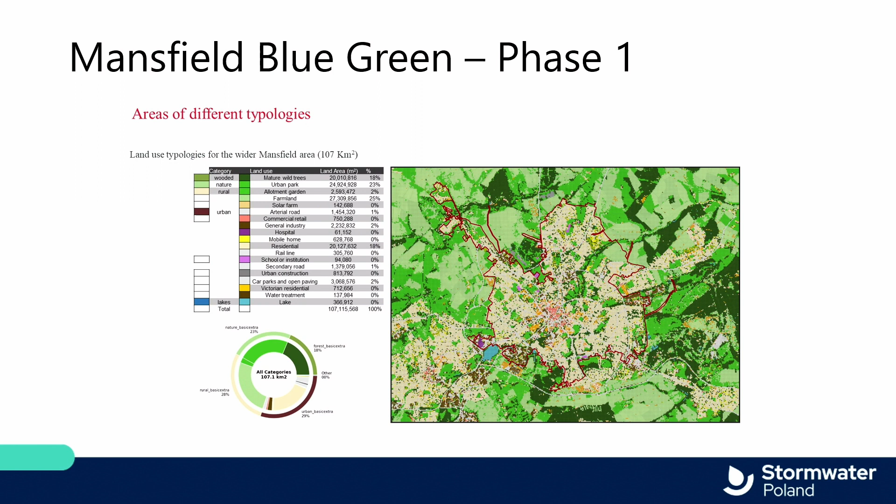The next step was then to map the relevant blue-green measures to specific Mansfield land uses. This gave us an understanding of the measures that are easily deployable in each typology. For example, in this case, permeable paving is deployable in residential areas, car parks, or commercial areas, but not appropriate for other land uses. This matrix was co-developed by the water utility client to match their appetite and level of ambition for green interventions.

We then selected typical sample locations for each typology. And for each sample location, we designed solutions for each area using the matrix, taking into account local conditions such as road arrangements, ground slope, traffic, existing infrastructure. The aim of that process was to ensure that there was a robust engineering evidence base behind our proposals to allow us to strongly ground truth the outputs from the digital analysis.

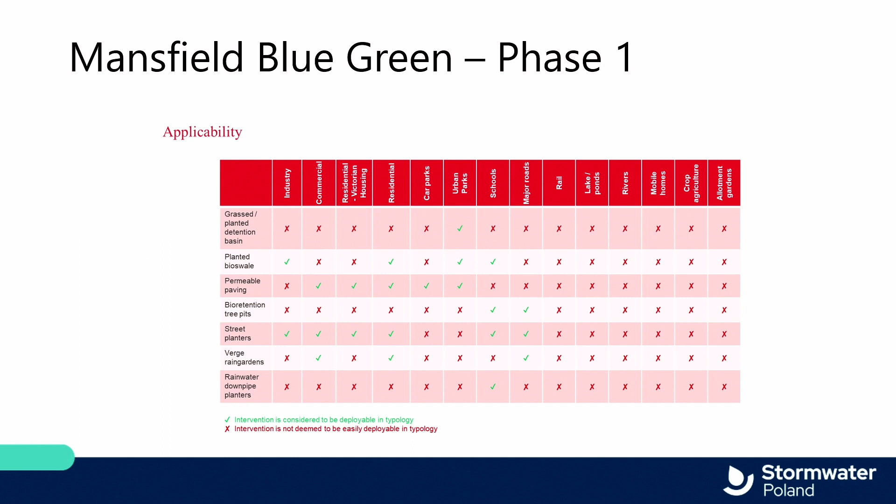So using our digital tools, we were able to establish the potential for each typology to provide blue and green infrastructure and storage. And by combining this data with the land use areas derived by terrain, we were able to quickly assess the potential of the whole town to accommodate blue and green measures and also quantify the number of each intervention.

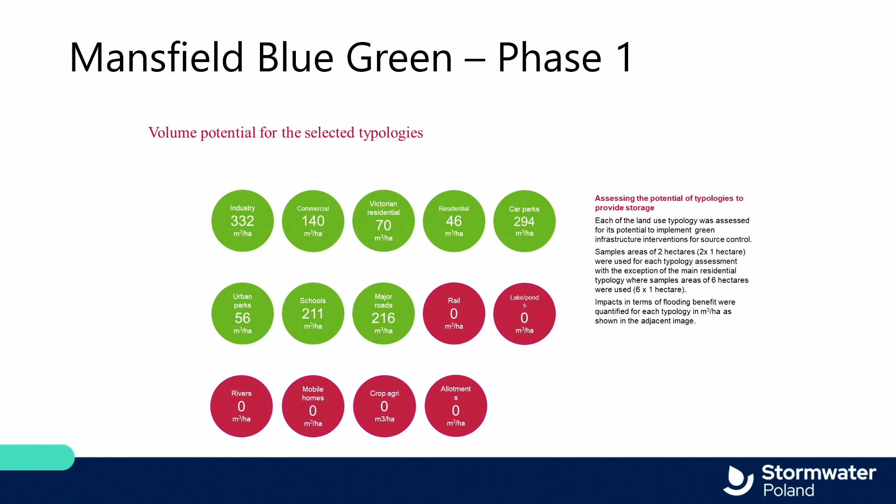And as part of this study, we used the wider benefits associated with blue and green assets. The benefit mapping exercise uses an input-output outcomes model that displays connections between resources, activities, and outcomes of a project. And for the purpose of this exercise, we also mapped the benefits to a six capitals framework, which is the framework the utilities in the UK generally use for looking at benefits, including natural capital, social capital, financial capital, manufactured capital, and intellectual capital.

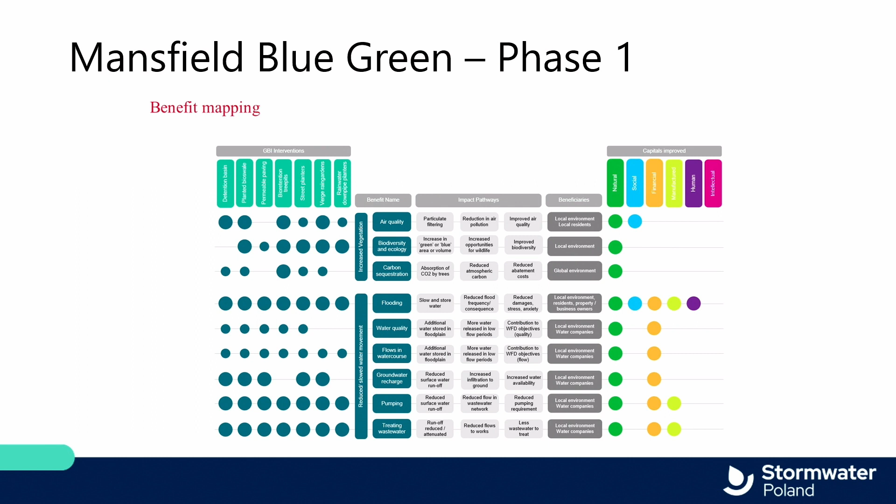We were then able to assess and monetize some of the benefits. Benefits were excluded from valuation if information available was not sufficient for a quantitative assessment. Benefit transfer was the main method of monetization used in this study. And the table outlines the value selected for the monetization of each benefit and the formula used for the calculation. And the graph on the right presents the cumulative benefits over 25 years.

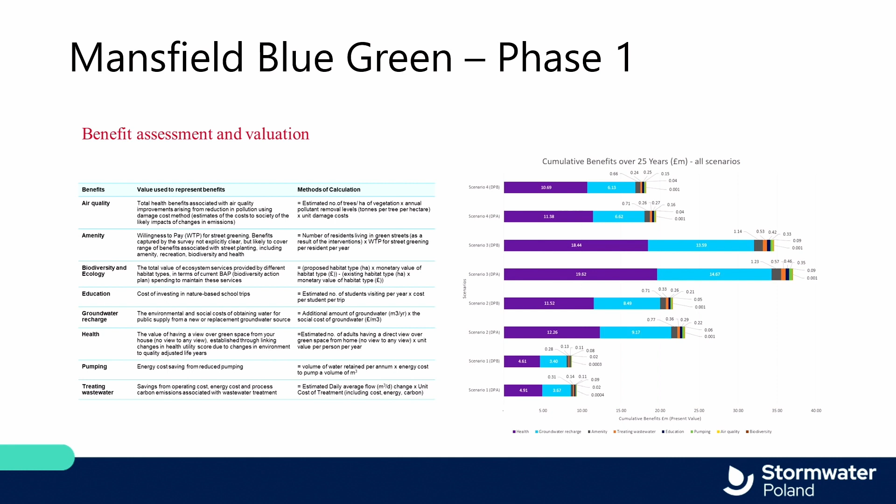So after securing funding, the next challenge was then to support our client in delivering a rapid rollout program. We recognised that a similar innovative strategy was needed to enable the client to plan the delivery of the project and saw an opportunity for digital methods to be able to help. Whilst the client had a town-wide storage target and a budget and some basic intervention requirements, this was based on a master plan study, aggregated across the town. It did not give sufficient detail to base more detailed strategic decisions upon.

We therefore worked with the client to develop a town-wide design tool to assess and locate blue-green infrastructure rapidly on a street-by-street basis, enabling Severn Trent, our client, to rapidly trial different strategies before finalising the overall strategy for the project.

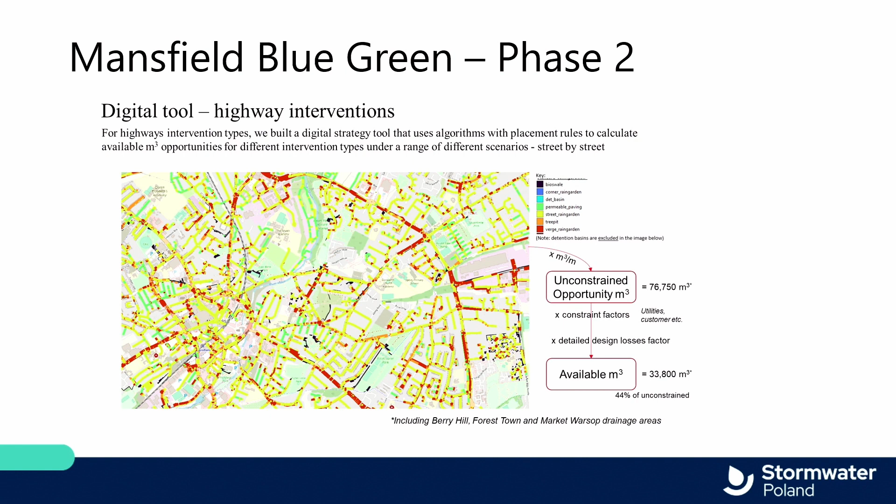And to further support the client in delivery, we also developed a town-wide dashboard that the client is actively using both to test strategies and to monitor delivery. The dashboard has supported them in their decision-making, allowing them to reach a balance of interventions at a cost that they can afford, optimising the process. What they have now is a process that any town or city could replicate that can enable rapid identification of blue-green potential to support both business cases and implementation.

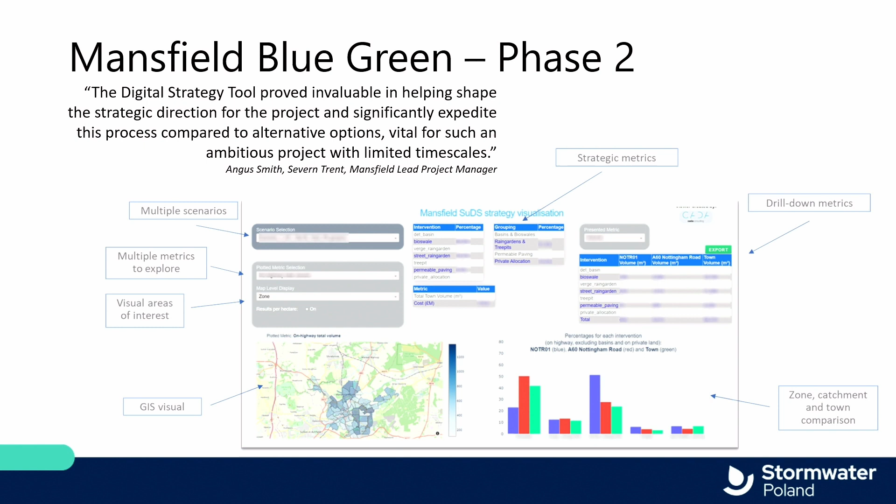The third example: if we are to deliver next generation blue-green infrastructure at scale, we need better tools to understand and identify the potential for their early use in the project assessment process. Too often, nature-based solutions are seen as an add-on or an afterthought.

We've been working with Scalgo in the UK to develop a proportionate and accessible tool to enable early exploration of nature-based solutions within catchments. It is not a detailed design tool, but a process that allows impact and benefit to be rapidly considered at an early stage. This then allows potential costs and benefits to be understood and supports early collaboration with stakeholders and landowners to deliver nature-based solutions.

The tool is a web-based mapping tool for the initial assessment of the potential of nature-based solutions, initially on flood schemes, focusing on natural flood management. The aim is to mainstream these assessments within scheme design, with the hope that it will lead to greater uptake of these solutions in projects. At the moment, the scope of the tool is limited to the UK.

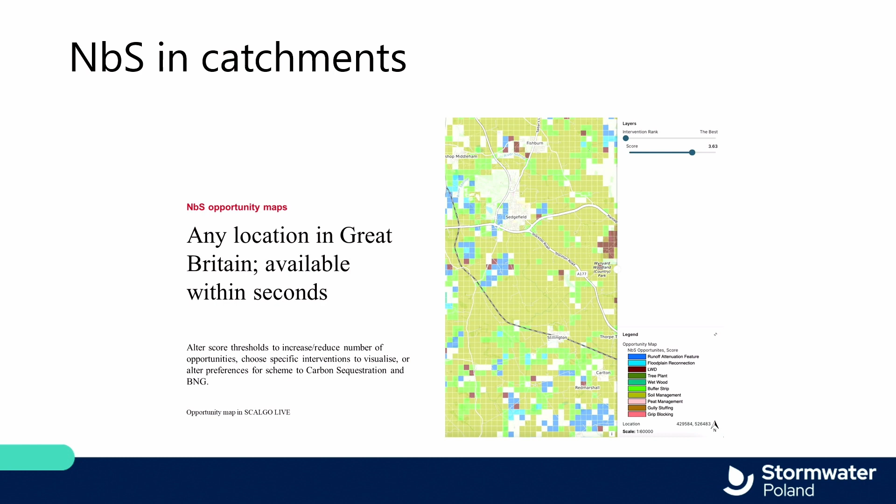Within the tool, there's a multi-criteria analysis using a range of online data sets that determine suitability scores for 10 types of nature-based solutions on a 150-metre grid. Nature-based solution types include attenuation, wetlands, and tree planting, for example. The tool is a dynamic interactive tool. Threshold and suitability scores can be set to increase or reduce the amount of opportunities being displayed, and alternative options for nature-based solutions can be sought by changing the suitability ranking.

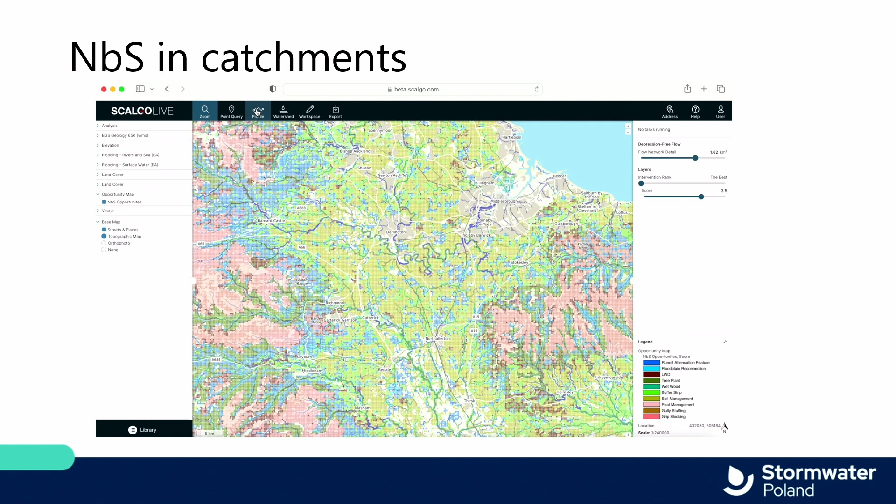In addition to considering flooding, the map display can be altered to show the relative suitability for carbon sequestration, for example, or habitat creation. If you select a watershed, you can explore some baseline data, such as baseline carbon sequestration values. You can then look at the potential impacts once nature-based solutions are applied. It is then possible to look at specific interventions. How much are they likely to cost to implement? What benefits could they bring to either carbon or ecosystem function or water storage?

The aggregate tools are dynamically linked, so when you change one criterion, all the outputs, such as cost and carbon sequestration values, change immediately. And you can generate a cost-benefit graph to explore available budget compared with benefits across the scheme, making sure we can look at good value for money.

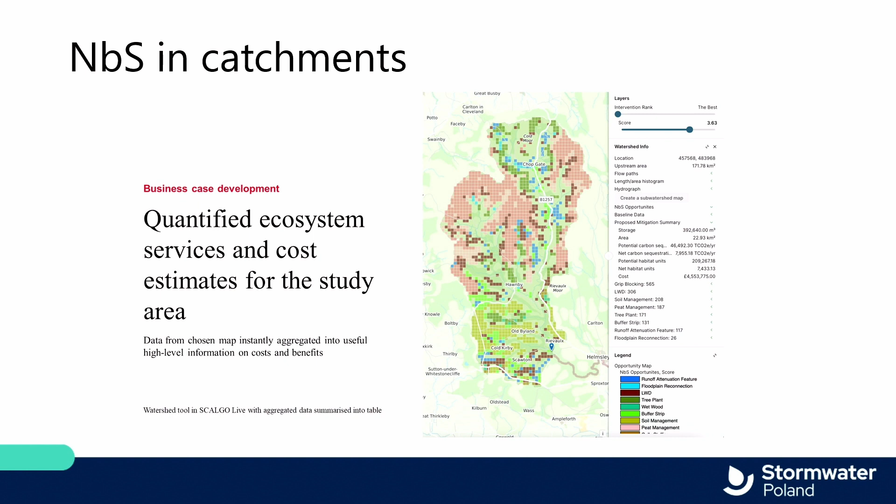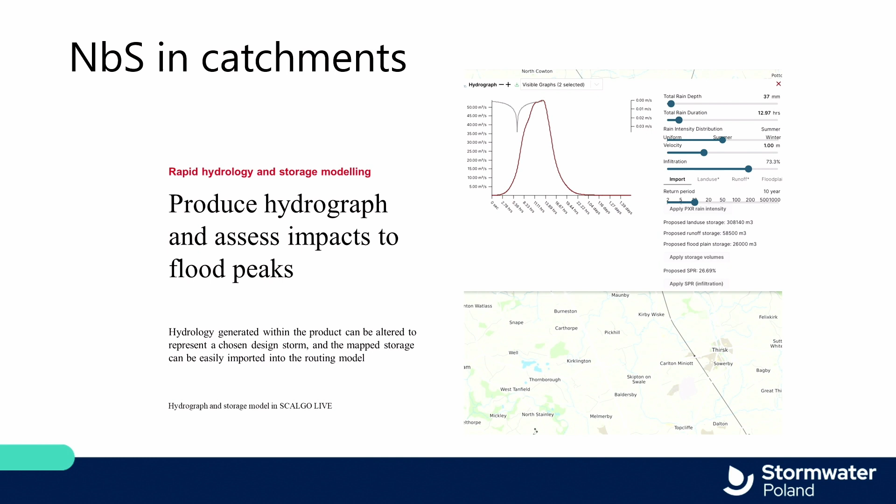Whilst remaining in the web-based software, the hydrology of the catchment and watershed can also be explored. This then allows an initial assessment of the potential impacts to downstream peak flows resulting from the mapped nature-based solutions, which can then inform scheme design approaches in terms of the potential for nature-based solutions or natural flood management to support flood risk. We're now actually using this approach across the UK in our flood risk management projects, allowing early identification of interventions to support detailed design and landowner consultation activities.

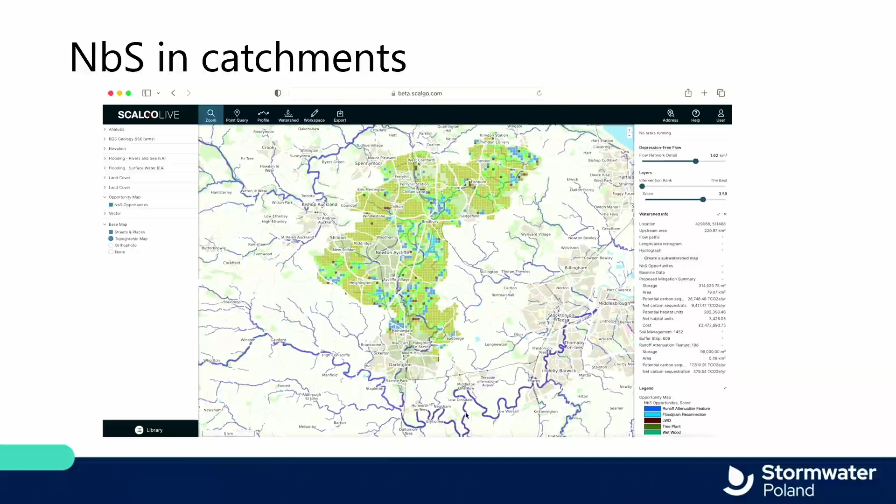The fourth example is New York, and I love New York as a blue-green infrastructure example. I think it's a visionary program they've operated out there. I wanted to briefly reflect on our experience in New York, which I see as one of the beacon cities for a blue-green approach, where there is now over 10 years of experience in retrofitting blue-green infrastructure into complex and cluttered urban environments. When we talk to cities and they say it's too difficult, I always point them towards New York.

The New York approach was driven not really by flooding, but by a need to improve water quality in the Hudson, and hence a need to better control CSO spills. A detailed study, as presented in the New York Green Infrastructure Plan in 2010, identified the opportunity for a blue, green, grey solution to manage stormwater, whilst also delivering a cost-effective solution with wider benefits to the city. It was a visionary approach at the time. Arup has been involved with the project from the early stages of delivery and has delivered almost 1,000 interventions across the city.

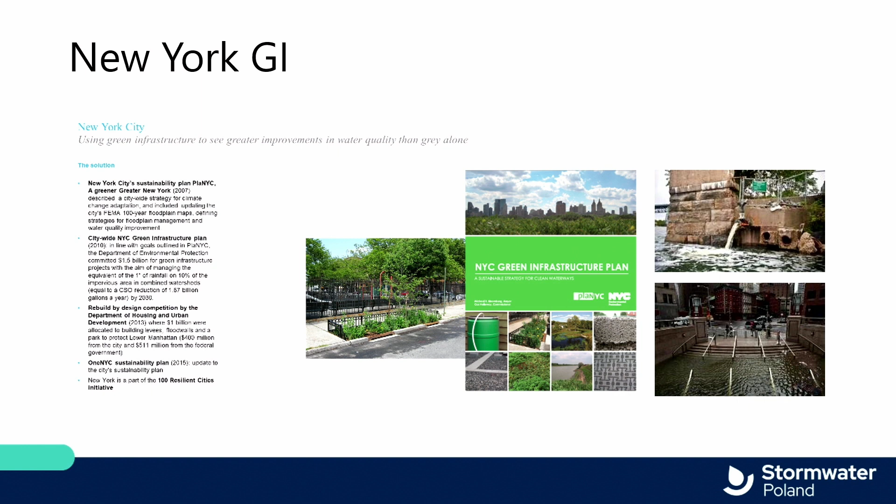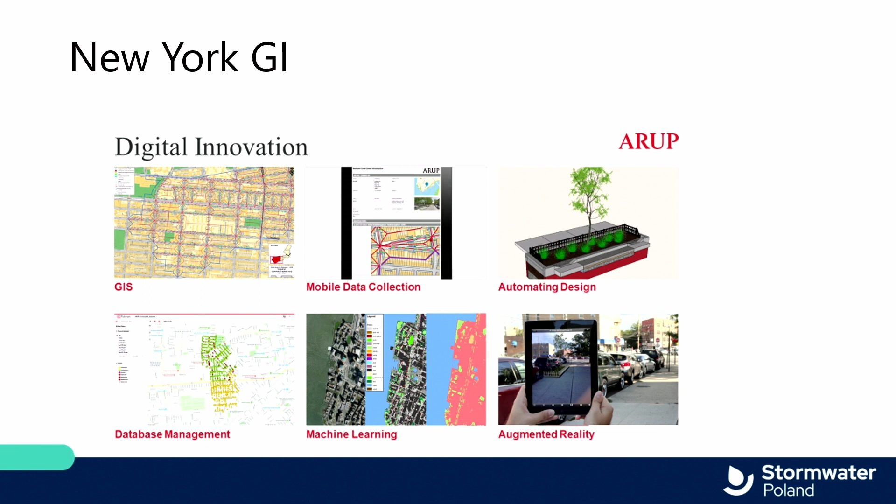Over those 10 years, our experience has shown that digital solutions have a key role to play in a large city, whether that's GIS mapping, mobile data collection, or automated design. If we are to deliver blue-green infrastructure at scale, we need digital solutions to support us. So the output is a network of interventions across the city, which Arup and others have supported in delivering.

The outcome is a more resilient city and a far more attractive and healthier city with the potential for wider benefits. And the city is now very experienced in the delivery and management of these systems. In particular, they have developed processes for the operation and maintenance of these features, which are now an integral part of the city's infrastructure and asset base.

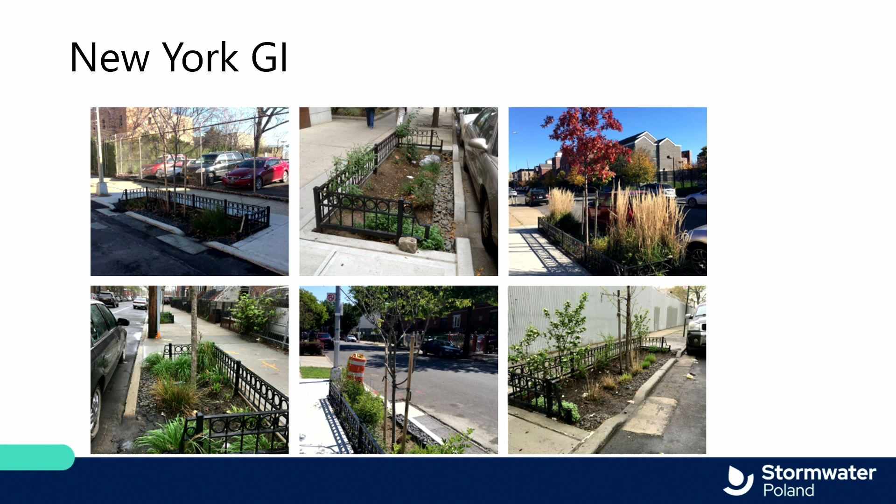And I love this photo. They are now just a key feature of New York's landscape, bringing value to the city beyond their core function.

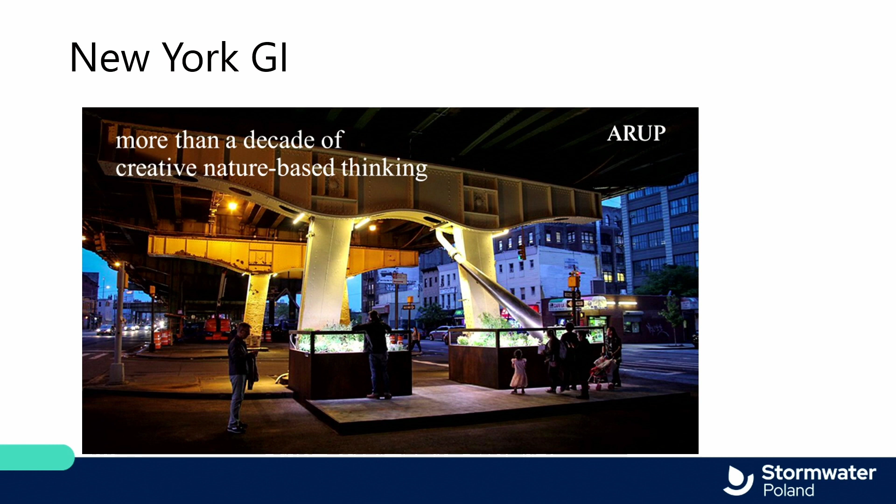Fifth example is stormwater in London. The argument for blue-green infrastructure has, I think, largely been made. I think we all in this room would support that. And there is agreement in the value that nature-based solutions can bring to urban water management. Often the key challenges are not technical, but financial. We often see challenges around who benefits and who pays. Different collaborative arrangements and market mechanisms are developing to overcome these barriers.

The concept of stormwater markets is not new. They have been in place in the US for a while. But in London, we're currently supporting the city in the scoping of a potential market approach there. Like most cities, London has experienced being badly impacted by extreme weather events, with a big event in 2021 that disrupted a number of properties.

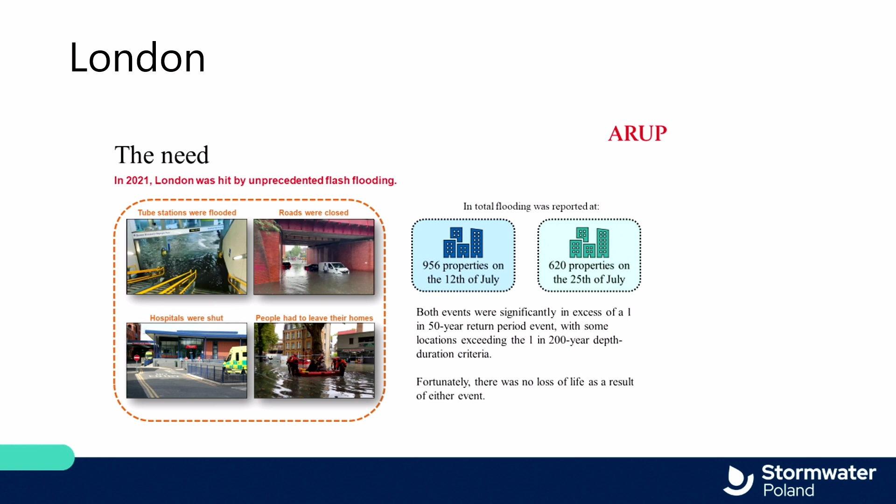The events of July 2021 were a catalyst for change and brought together various parties across the city to explore a new approach to managing stormwater, aligning priorities, working together, sharing knowledge, and looking at co-funding opportunities. And the city is working to strengthen the mechanisms for reducing flood risk across three streams: spatial planning, implementation of SUDs on new assets, and making better use of the public realm. And the aspiration for the city is high through to 2050.

But if this ambitious target is to be delivered, the city will need to optimise the opportunities to deliver SUDs across all aspects of the management of the city. One area of particular focus is street works. There are over 20,000 major street works and 140,000 standard street works in London each year, where the city is dug up for maintenance activity, whether that's ICT or electricity. And to date, very few of those works have resulted in SUD schemes.

Street works offer huge potential for one strand of activity to retrofit SUDs across the city. This potential is further enhanced by digital technology, where we can get insight on where areas with an opportunity need for SUDs overlap with potential future street works.

So effectively, the model we're exploring is this. The water utility or the city identifies priority areas for SUDs interventions based on their modelling and regulatory targets. When street works are undertaken, the proposed working area is mapped against these priority areas. Where there is alignment, then a market mechanism occurs, with payment to the contractor to also deliver SUDs. Lots still to be worked through in terms of how it will work, calculations of market value, but a huge opportunity to deliver SUDs efficiently at scale and optimise processes.

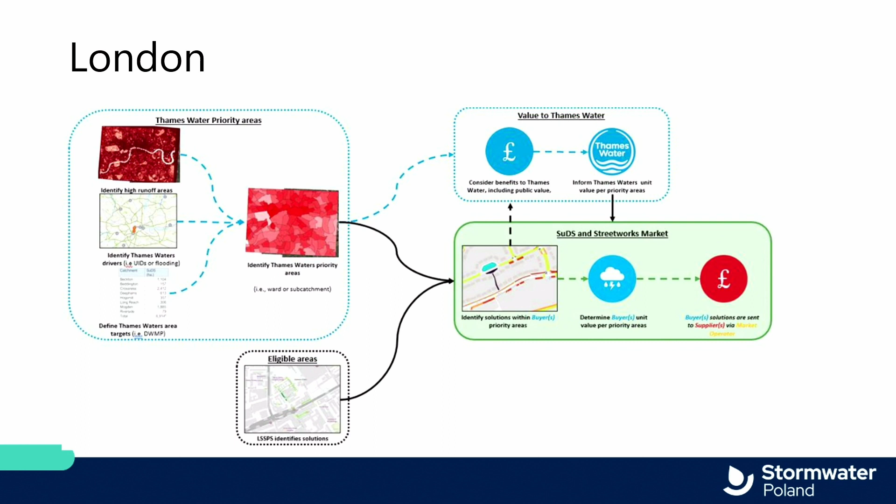...been around technical and financial issues, which is all very important. But I also think it's important that we remember that blue-green schemes all sit within communities. And we are continually exploring tools and processes to best engage local communities in solving wider flooding issues. And we currently have one live research project in the UK working with a number of water utilities there.

SUDS Plus is an innovative government-funded project. It is aiming to establish a community-based approach for designing, delivering and monitoring SUDs that provide multiple benefits to the community and the environment. The project is aiming to focus on how water can be shifted from a problem to an asset. And it is aiming to redress the traditional approaches where residents are consulted very late, and to work with them from the start to co-create interventions.

One of the key challenges we need to address is language and communication, ensuring that complex principles are presented simply and are understood. As research develops, we are developing a number of outputs that may be of interest, including engagement and workshop tools, survey proformas, and reports and visuals. Please feel free to explore them. But I do think it's important that in amongst all the clever technical innovations that you may be exploring over the next few days, we continue to also innovate in how we engage and work with local communities too.

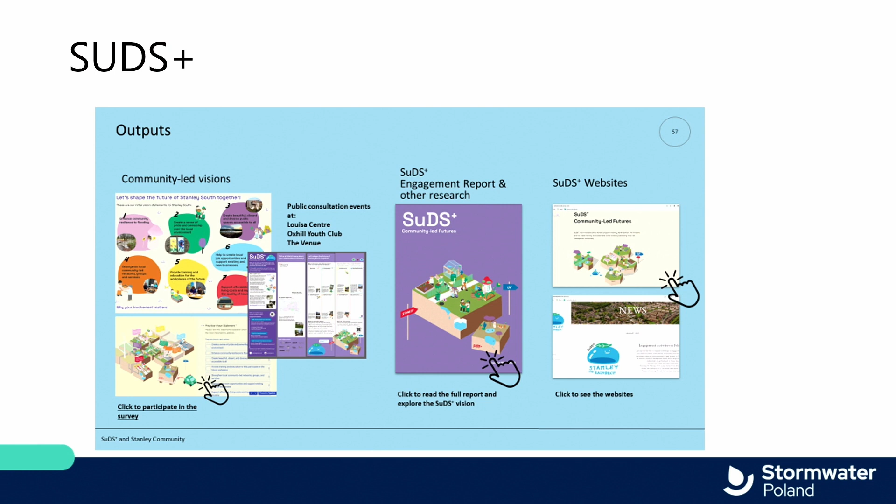Finally, I thought it'd be useful to briefly touch on the subject of stormwater reuse. I think if it isn't already, in large parts of the world, this will be as important an area of focus as flood risk, water quality and nature-based solutions, as we look to adapt to a changing climate. We've done some work in Australia in this space, including mining of sewers for water. And I would just like to share some initial insights from there with you today.

Melbourne is very much recognised as a vanguard city when it comes to urban water management. It has been through a number of stages of water management and interestingly has been focused on stormwater reuse for almost 20 years or more, whilst now also beginning to look at nature-based approaches to rebalance runoff.

In exploring stormwater reuse, there was a recognition a few years ago that a new approach was needed. New collaborative governance structures were created to integrate the management of the water cycle. There's also a need to recognise and re-evaluate the opportunity and benefits associated with stormwater reuse, and a need, as with other examples, to explore more collaborative delivery models.

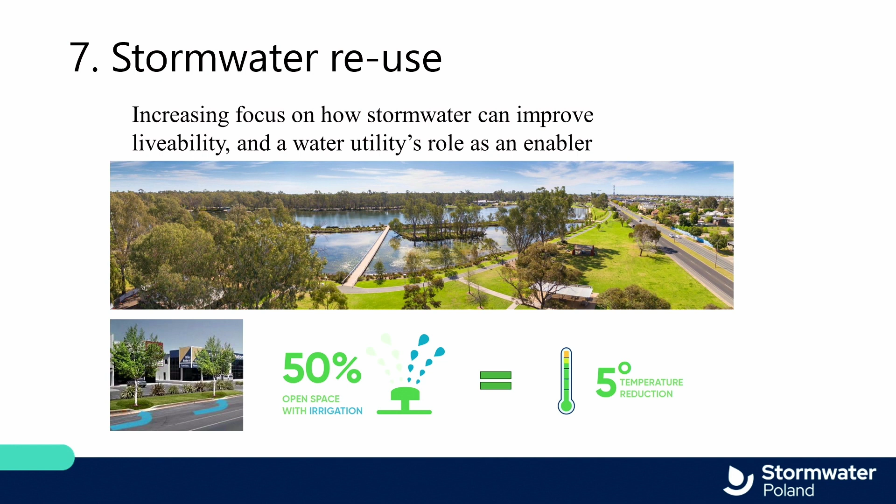As a city, whilst conventional water supplies are in decline, stormwater and wastewater resources are growing as the city grows. To address the supply-demand gap, Melbourne's water strategy is targeting 150 gigalitres of alternative water supply by 2050. And there is a clear focus already within the city on how stormwater reuse can support the city's livability aspirations. Increasingly, though, there's the opportunity to look at stormwater as an alternative water supply.

At a local scale, they are showcasing a development delivered by a water authority in partnership with a developer, 500 homes with both recycled wastewater supply and rainwater harvesting tanks. Rainwater is used in the hot water supply system. Smart technology is also used to monitor rainwater tanks and preemptively empty them before a storm to capture rain to minimise peak stormwater flows. And I know there are a number of similar systems in the market at the moment, but this one's really interesting both in terms of a water supply and an attenuation, dual function.

But more interesting for me probably is starting to explore regional opportunities for stormwater. New development areas in Melbourne already deliver stormwater treatment wetlands as standard practice as part of planning. And the opportunity now is to create linked harvesting networks to capture the treated stormwater from these wetlands and transfer to local reservoirs. Treated stormwater can then be utilised for agriculture, environmental needs, or city water supplies in the future.

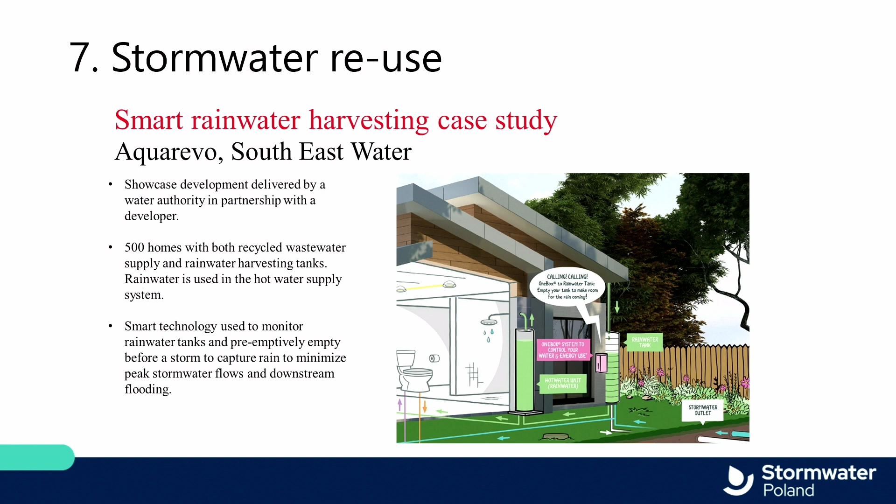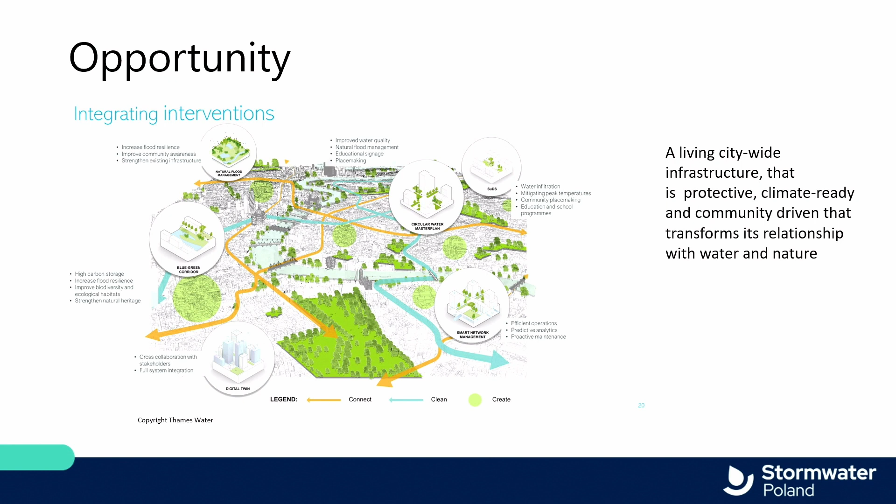So, three quick points to close. And apologies for repeating myself. Clearly there are challenges, but there is a huge opportunity for us to reframe water in our cities and to deliver a citywide infrastructure that is protective, climate ready and community driven. And I think the onus is on each of us to grasp that opportunity, recognising that we need to do things differently.

In terms of doing things differently, we need to take a systems-wide approach, working across systems that don't just involve water specialists. And I think we need to move from discrete interventions into a wider system and spatial framework that can set the vision for what we want to do. That's what we set out to do in London. And delivering that vision will be facilitated by a range of systems and processes.

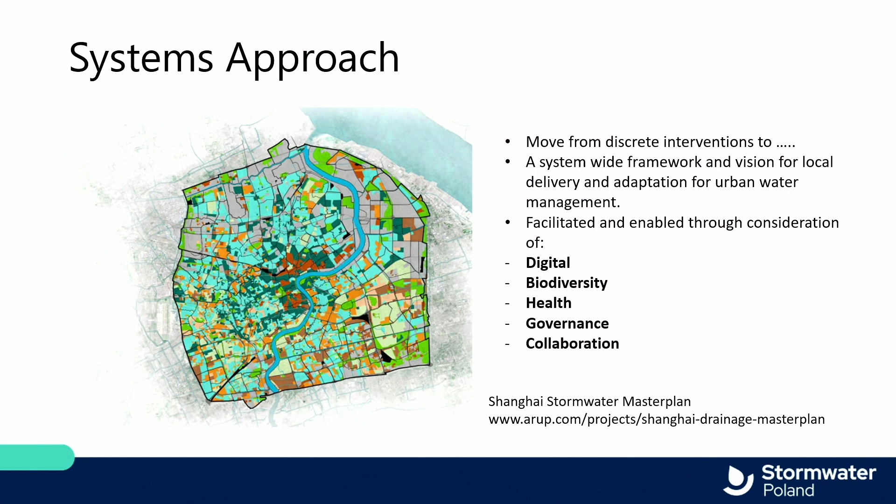And finally, we need to ensure that we get better understanding and capturing of value to enable us to deliver wider and more robust business cases that support new next-generation approaches. These are exciting times for water and environment professionals. The challenges of water and climate change are real and daunting, but the opportunity is there to shape a better world. Thank you. Thank you very much.

Justin, can I just ask you one very quick question? Out of these places that you've mentioned, New York, London, and others, in your judgment, which town, which place would be a sort of benchmark, a blueprint, a role model in terms of green and blue infrastructure? I always refer our clients to New York. New York. I say New York.

It's a massive city, and in many respects, trying to make a comparison with a town might be difficult. But if New York can do it with complex city infrastructure in place, whether that's subway systems or whatever, and they can install... Then anyone can do it. Retrofitting is a challenge, but if New York can retrofit, I think anyone can retrofit with the will.

Of course. I was just wondering, because you're talking about next generation infrastructure, and with the time that's flowing so fast and the technology changing so fast, what is next generation? We're preparing for next generation, but once we prepare for this next generation, the generation after will be in place already. So how do you define this next?